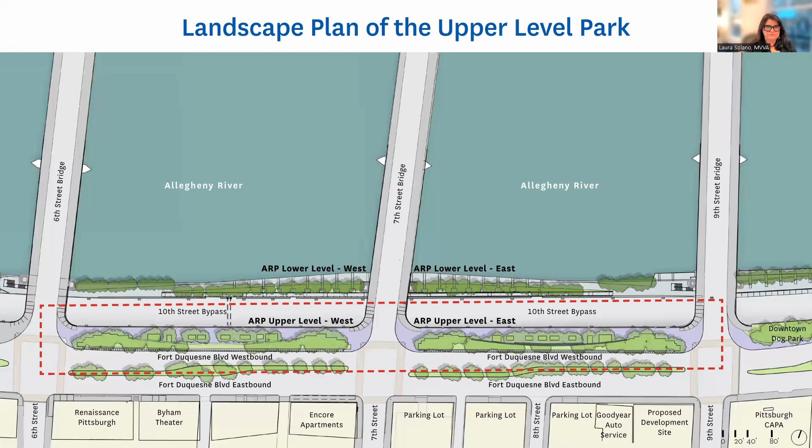So what were the design ambitions for the upper level park back when we started it in 1998? One was to provide a visual connection between the city and the river, a place where people can enjoy the magnificence of the Allegheny River. We wanted the upper level parks to be a threshold for the lower level parks and the river, providing a green corridor at the edge of the city that would be human scale and soften its appearance. Some of you remember it was just a narrow sidewalk against the river's edge. We also wanted to provide a place for strolling and respite, a meeting ground, and incorporating art into the urban experience, particularly since we're in the cultural district, was really important.

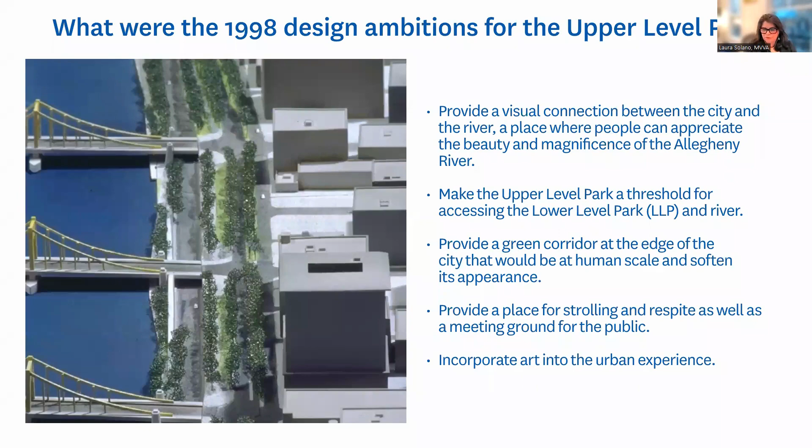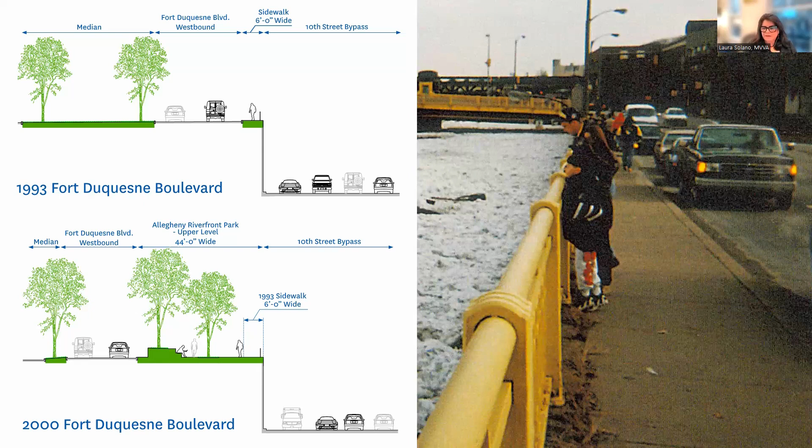Just a quick look at what the upper level park was before 1998 and what it's become. These are two sections. Looking at the top one, there used to be, next to the 10th Street bypass, sunken down, and the upper level park was once just a 6-foot wide sidewalk, as you can see in the photograph on the right. But there was quite a bit of space within the median. So the Cultural Trust, who was our client at the time, had the brilliant idea to take some of that green space in the median and move it to the edge of the 10th Street bypass, so that we could have a civic space, a place where people could come and experience the city and the river.

So one of the things about the upper level park that has become a bit of a barrier is this low retaining wall that was built right next to Fort Duquesne Boulevard. It's a low wall, but it was installed so that we could get enough room to plant trees in this area, because it's an urban space close to the highway. There really wasn't a whole lot of depth to put trees in, so we raised up the park. But in doing so, we also unintentionally created a difficulty seeing in.

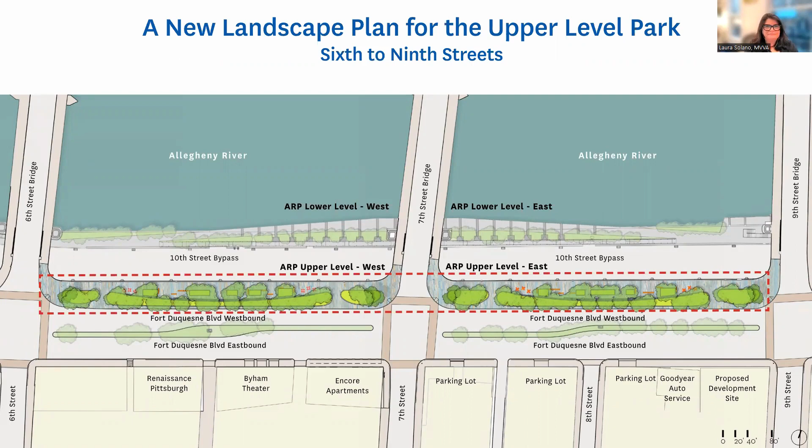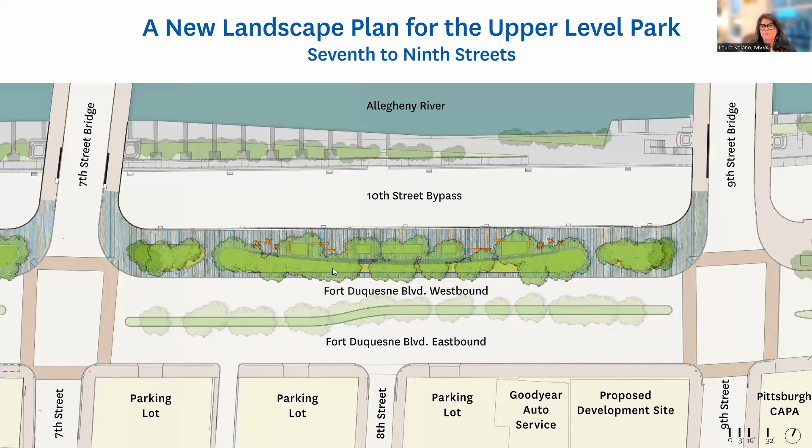So this is a close-up of the plan, just looking at one section from 7th to 9th Street. We have kept almost all of the trees. We have created islands on the end, which I'll talk about later, in order to provide some views in. And we have an updated and sturdier version of the pavement that was created by Ann. Some parts of the park remain exactly the same, the long bench, but we've added other things to meet some of the goals that we've all talked about.

So this is one of two diagrams that I'm going to take you through to show you what we've done. First of all, keep in mind that the total park length is about 500 feet, so it's fairly long. Back to that wall, which is the yellow and the red dash, what we've done in order to create more visibility and accessibility into the park is take off about 85 feet on each end. So that means 170 feet less wall for each park section. As you'll see in future sketches, this really helps to open up the park.

The beds that were here were split in half so that we could provide that access, both visual and physical. But we wanted to sustain the amount of planting that was in the park, so we made plant beds on either side. Those also help to give a human scale at the wide intersections that we have, and start that experience of walking under the trees right from the intersection.

The tree canopies are being lifted for better visibility. It's been a while since they've had their bottom limbs removed, and we've always envisioned these to be very high canopy trees, as they are in many cities. These are London plane trees. They're great at growing in the city, and they have beautiful bark and a dense leaf that's great at providing shade. All of those things together, we hope, really improve the visibility into the park, and also while you're in the park, looking out from the park as well. So you get to open space quicker in this design on each side.

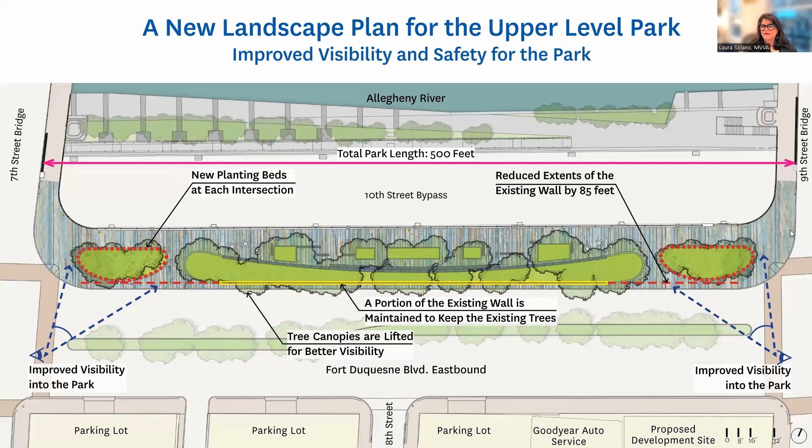We also, of course, looked at universal accessibility, making the park more comfortable and lively. A park becomes lively when you give opportunities for people to occupy it, and also when it's safe. So there are a couple of things. One is the bluestone pavers. We have been doing a lot of research, and I'll show you more details later about another type of bluestone pavement to use. We think it's important to retain the artwork that Ann Hamilton gave us on this piece, so we're looking at using a bluestone type that is stronger, more smooth on its surface, and the pattern will have fewer joints. So it will, in fact, be much easier to move across.

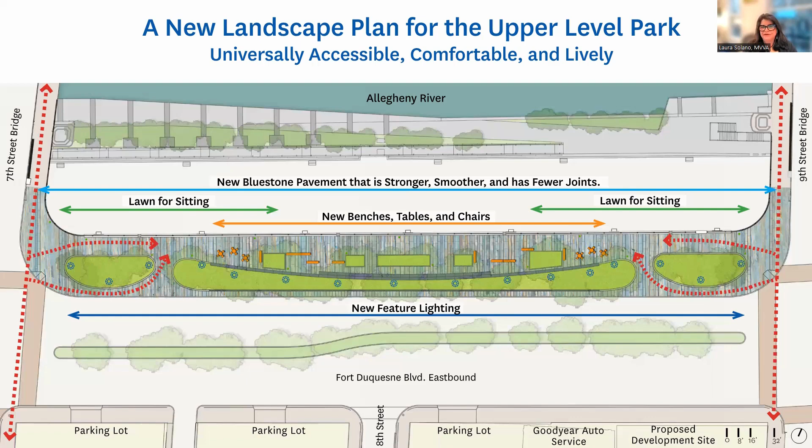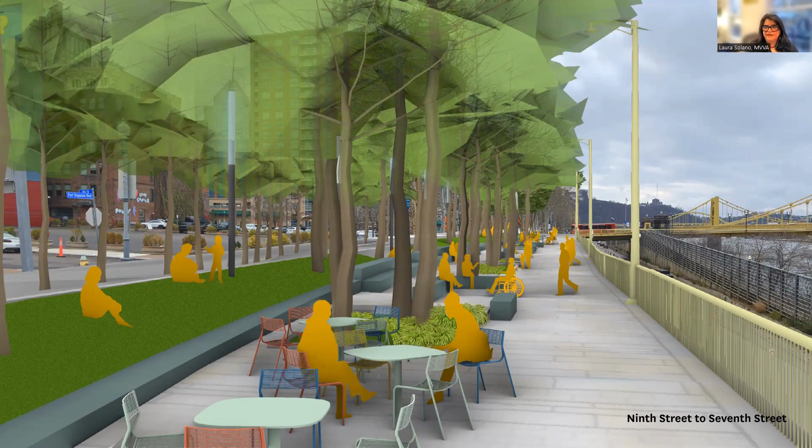So I thought it would be helpful - landscape architects and architects always think that we draw everything so carefully that everybody understands exactly what we're doing. And I always find before and after images to be really helpful in explaining ideas.

So this is the first view before in the middle of the park. And there's the second view, that's the one we just saw. So the difference is, of course, the trees are lifted and there's much more activity or space for activity.

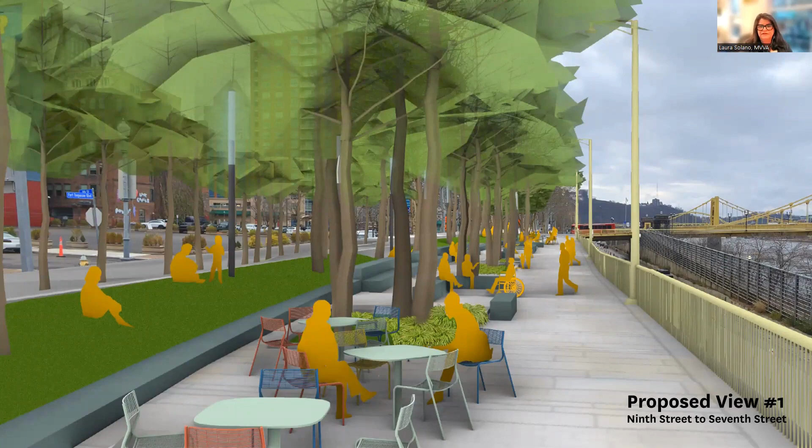Second view, and the after view.

We're again extending the lawn to both places. We're making that place for people to cut through. So if you're walking in the park, you have the opportunity to take another route instead of going straight. That's going to help on activity days when the public kind of streams over the existing wall. But you can see how taking out that wall really helps to open up those views back to the city.

Another view from 9th Street, the 9th Street crosswalk, and then what that will look like after that bed is made. And again, notice the wall and how it goes down into a curb and then flush on the side.

I think that what we're seeing in these sketches is that the city - the distant city and the near city - are going to be much more visible. And so having the city and more eyes on the park is going to make a big difference.

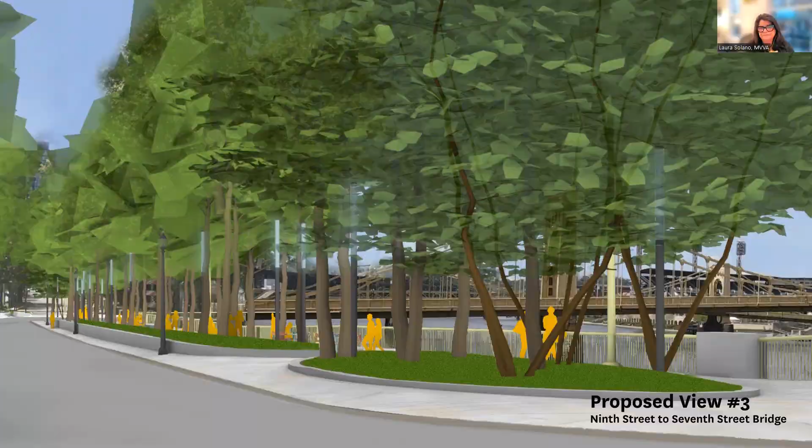This is a before picture down at 7th Street, crossing the crosswalk, and this is what it would look like afterwards. Again, from 7th Street, looking down the corridor. And 7th Street after things have been restored or renovated.

So there's that flush curb that can get you up. And again, that cut through kind of helps you to see the city in the background, and of course the distant city as well.

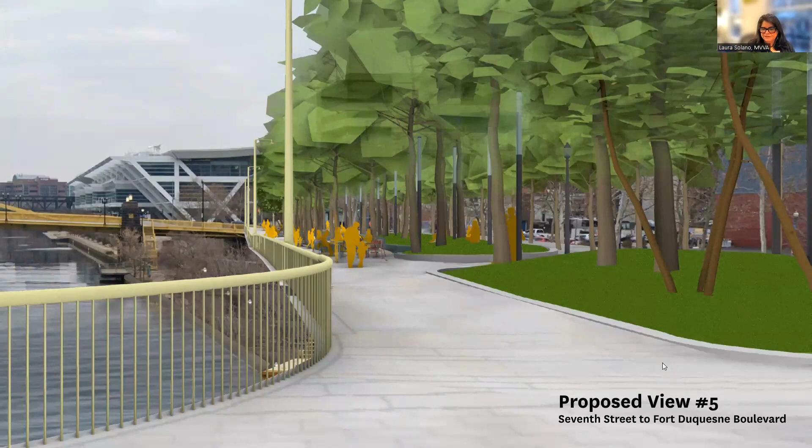So now I'm going to talk about just a few details. Of course, when you make a landscape, the overall, what we call big moves, are really important - the organization of a site, et cetera. But the thing that people really come in contact with, and that makes a place that they love or don't love, is how those materials and plantings and furnishings and lighting at human scale interact.

So just a minute to talk about the difference between Pennsylvania bluestone, which is what is installed now, and New York bluestone, which is what we are proposing. This is a very small geology lesson, but there is a very large bluestone vein on the East Coast. It starts around Pennsylvania, really just a little south of that, and goes all the way up through upstate New York.

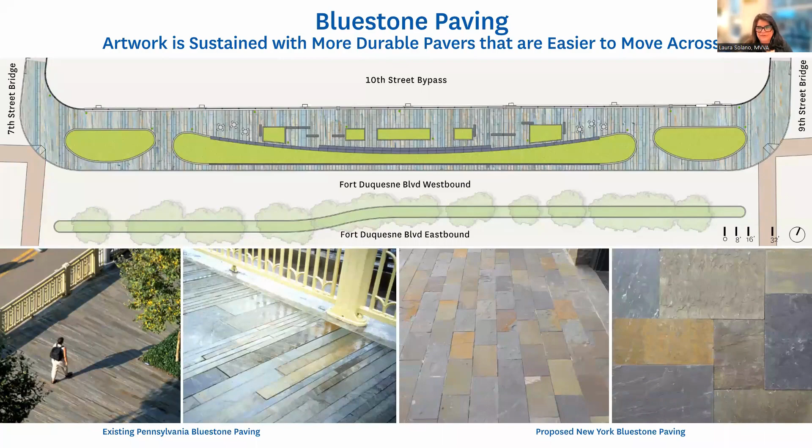We're also going to refresh the planting, adding some spring color by putting some amelanchier trees, or serviceberry trees, here, which have terrific flowers and fall color. Those will go into the end beds here and here.

We're also imagining that the lawn, which is in all of the beds, would have a blush of crocus in the spring. Crocus are one of the first signs of warm weather to come, and I always find them hopeful when I see them in the landscape. So we're going to put a lot of those in the lawn so there's this flush of color early on. It'll be a signal that warm weather is coming, and they're easy to maintain—they simply get mowed down with the first mowing of the lawn.

And then we think we want to put in some ground cover plants in the existing plant beds that are already in the plaza. We're showing Japanese forest grass, but we're going to look for a native plant. The story of the forest grass is simply that we need something that is really tough, that can withstand the uses as well as the competition with the roots already established on those trees.

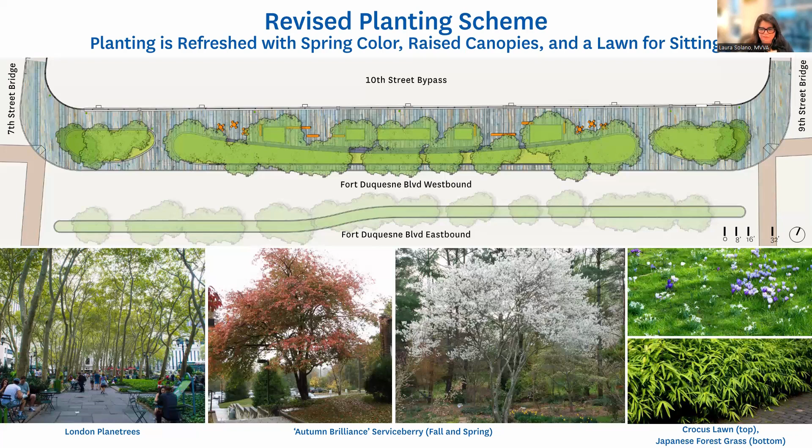This is a park in New York, and one of the things I've always loved about this park is how high the plane trees have been limbed. This isn't necessarily the end ambition, but you can see that you can create this kind of beautiful cathedral, almost. And over time, it's certainly possible for the London plane trees in the park to head that way.

As I discussed, we're going to add more furnishings so that we create more places for people to come and visit—I went over the benches and the place for the trees. We're also going to repair all of the lights, which were actually recreated for the original park. They had been taken down, and we found the old drawings, the beautiful old drawings, and had them remade for the park.

We hope to introduce color all year round through pots. Nothing can really bring in that great eye-level variety and liveliness than something that's put in a pot and changed over time. We can put in greens in the wintertime so they don't sit empty.

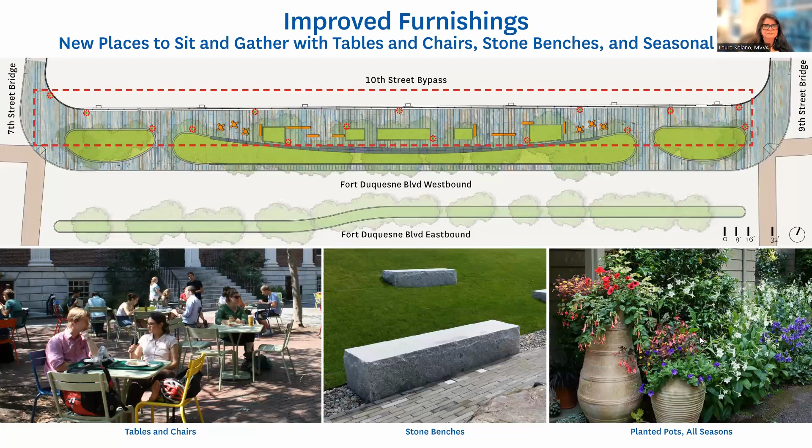And then last, the special lighting. We heard from many people that they wanted the park to have its own identity, and that lighting might be one of those devices to do that. So we are proposing to use a light column, an LED light column, that conforms to the dark sky standards followed in every city now.

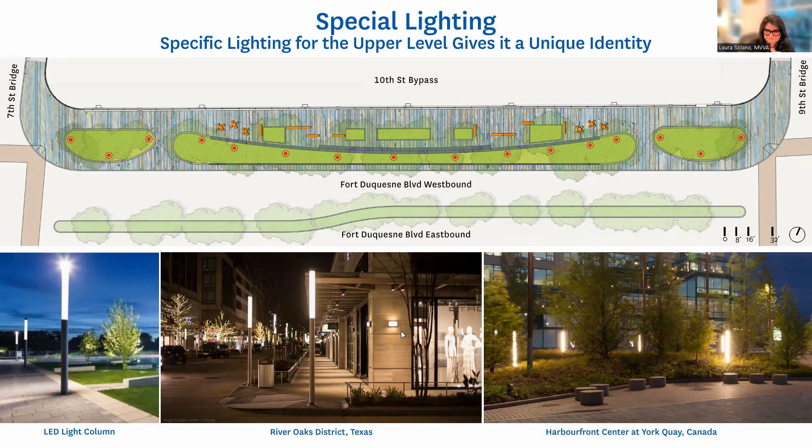So we hope that all of these components together will help people to look at the upper level park and use it in different ways, and that it will be an engaging place for people to gather.

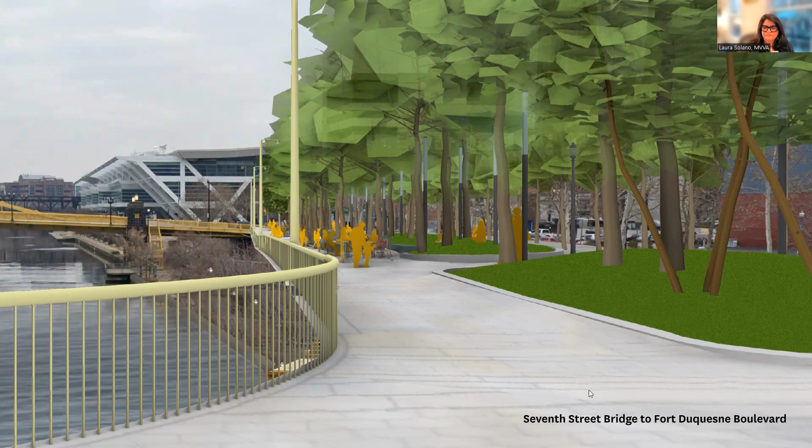But first, it looks like both Bill and Brian had questions about maintenance, and I want to briefly talk about that from our perspective, and then Laura may be able to say more about the grass in particular. One thing worth noting is that as part of the budget for this project, we've heard loud and clear that there were some maintenance needs that just weren't being addressed, and frankly that's outside of the city's core scope of services. So we want to make sure that as part of this budget, we're including a fund of at least $1 million that would each year be drawn upon to do additional things like resealing the bluestone.

I can speak to the grass, and actually one of the reasons we chose that option is that DPW really is quite good at maintaining it. They have standards and procedures for fertilization and aeration and all of that, and the portions of the park that are grass now are actually in pretty good shape. Anything else on the grass there, Laura?

Yeah, you just mentioned the area to the west of 6th Street. As we were visiting the park twice now, last fall, one thing we noticed is that grass is actually in pretty good shape, and we know it's pretty heavily used during activities in the summer. We think it's great to be able to sit on grass in downtown—that's a tradition you see in a lot of city parks—and it made more usable space. But in terms of maintenance, yes, it's much easier to take care of.

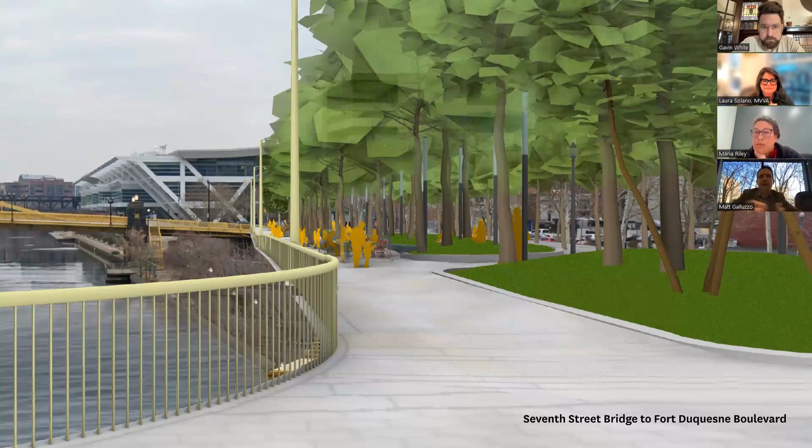And Gavin, I'll just share a quick anecdote. About a year ago, we hosted a session with Carol Brown, the former Pittsburgh Cultural Trust president and CEO, and Michael Van Valkenburgh, Laura's colleague. One of the questions I asked them was what are the lessons learned, and they both said almost in unison, maintenance, maintenance, maintenance. So Riverlife, taking on this project as lead, insisted that we structure our budget for this project with a $1 million care and maintenance permanent financial instrument. Those funds have been secured, and as soon as this project is completed, those resources will be deployed to do, as Gavin noted, the above-city-standard elements.

Great, I'm going to jump to the next item, which was a question about the fencing. Actually, the county will be refurbishing that fence along the whole stretch as part of their bridge restoration process, so that's already underway. We intend to keep the fencing as it is, though this is a slightly simplified rendering just for the purposes of computers, I think.

The next question got a little bit at some of these maintenance concerns—we talked about the funding source and then park rules. I think that really is a question for the city, but suffice it to say there are rules and a signage standard that we'd intend to employ here, as well as a dog park at the far end of the park that we think we could probably do a better job of pointing people to, so that this isn't serving as a dog park as a whole. Anything else on that front, Laura, or should we keep moving? I think we've covered it. Okay.